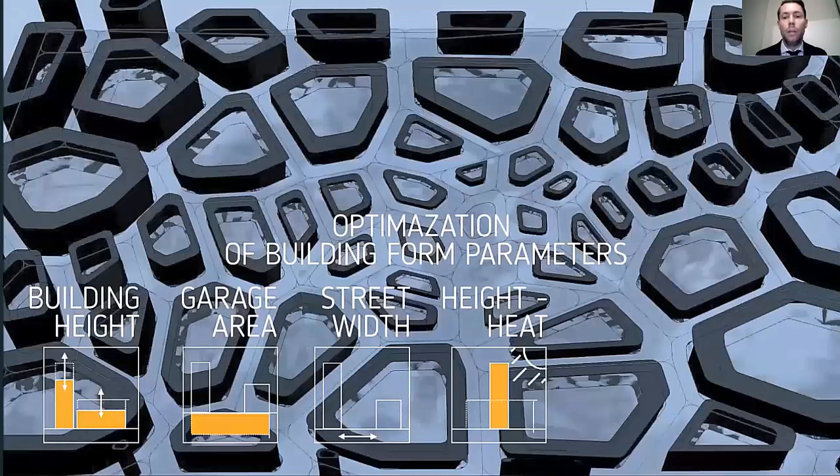Just to kick you off, I'm privately very interested in algorithmic design and parametric design as well. I understand that parametric design is the beginning of BIM. If we are thinking about designing, in this case urban structure, we can devise algorithms to optimize and develop a better urban structure, a more user-friendly urban space, if we use objective parameters that we know suit well the environment.

Just to start you off with the infrastructure, you basically know that the building industry is not effective enough. McKinsey & Company, you probably know them, they're the organization who prepare reports covering different branches of different industry sectors. They also do some reports on the building industry. They published in 2017, I think, a huge report called Reinventing Construction. And one of the guys from McKinsey said that we are potentially losing $1.6 trillion a year because of the insufficient effectiveness of the sector.

So let us think, what can we do to make that different? We'll be covering today parametric urban design. We'll be covering more precise and more detailed design, covering building concepts. And lastly but not least, we'll be talking about city infrastructure, which is really important, not only for us here in Poland, here in Europe, but also for people all around the world, because urbanization is making city infrastructure ineffective.

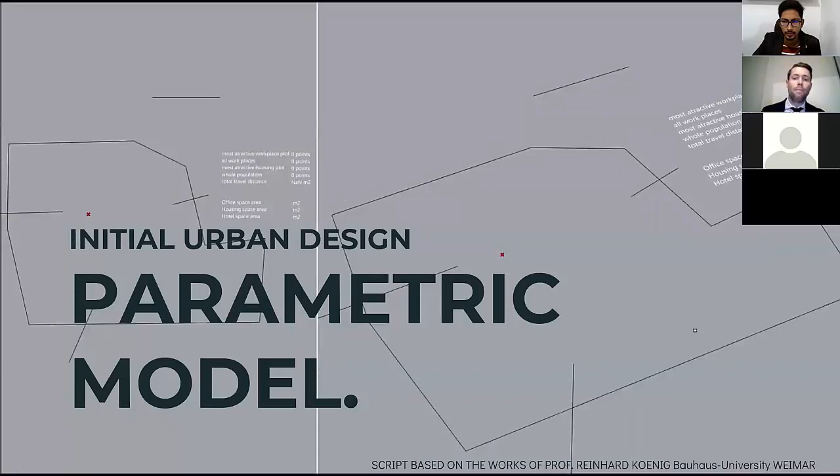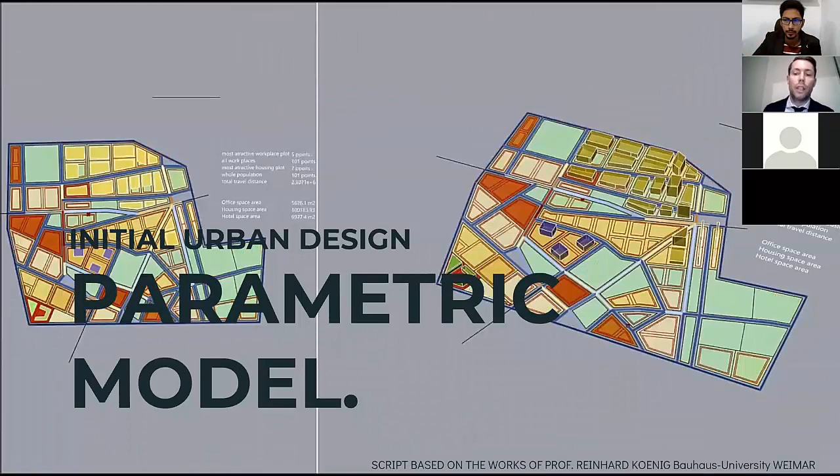What we do then is introduce parameters and algorithms. In this case, this is part of an algorithm devised by Professor Reinhard Koenig, and we've been playing around with this algorithm to devise a fast way to design urban space.

And this urban space, as you can see, is divided into different functions, because the monoculture urban spaces are out of date. People want to live in neighborhoods where they can use different functions, and different functions are intermixed.

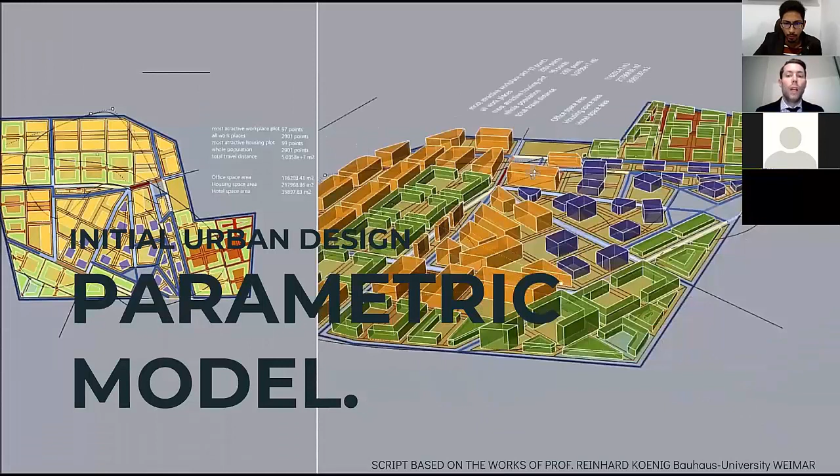Is it the grasshopper, Pawel? Yes, go ahead. Yeah, it's from the grasshopper, right?

Yeah, we are using different tools. I should say that this is in fact Rhino, and the algorithms are done in Grasshopper, with some nodes devised by other people, but we are also scripting on our own. But this is basically the same when we use Revit and Dynamo tools, because depending on the project, depending on what problems we are facing, we use different tools, which I'll be talking about later on.

As I say, we are using these algorithms to optimize the space, to give various solutions to our client, because we believe in choice, in informed decision making based on the parameters. So we are starting with BIM right from the initial ideas, which we try to make as parametric as possible, so that we can then objectively analyze the structure.

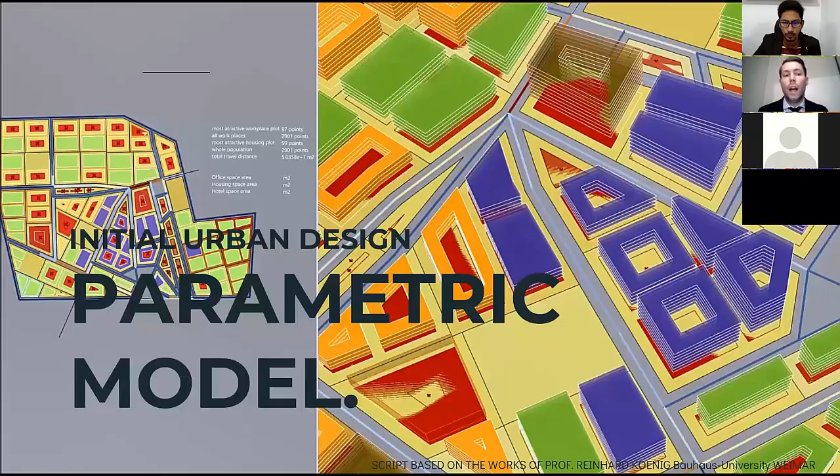And what you are seeing right now is the design space, the range of all the solutions generated by the algorithm. We sometimes use genetic algorithms, which are basically trying to find the most optimal solution, maximizing or minimizing one, two, or three of the parameters.

So what we are seeing here on the bottom of the screen, you see several of the solutions generated from the algorithm creating the urban design, urban structure. What you see up here are the parameters. On the left, these are the parameters which were going into the algorithm.

Let's say the grid of the streets, this was one of the parameters. Let's say the maximum length of the elevation, this was another parameter. And on the right, you've got parameters that are output of the algorithm that we are trying to measure, let's say the maximum usable space of all the stories of all the buildings.

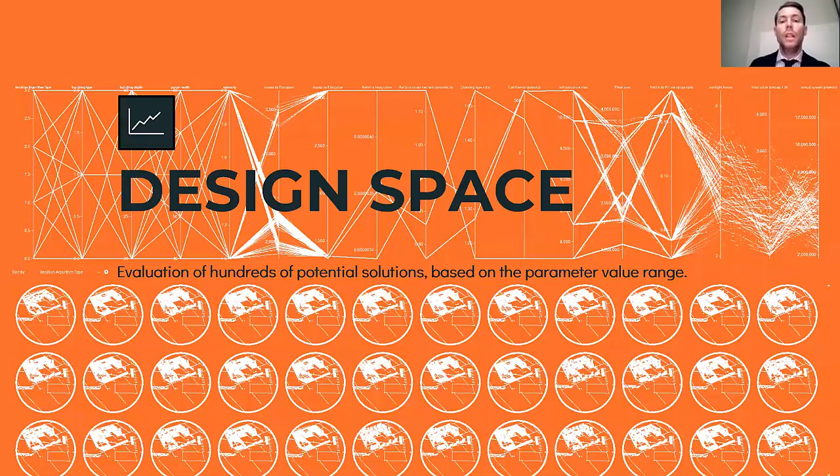Let's say that one of the output parameters is the area which is shaded, because when we are designing housing districts, we want to avoid shading too much of the elevation. So based on these parameters, we then try to select the most optimum solutions.

How do we do that? We just narrow down. This is the snapshot which I'm showing you is just one of the tools, called Design Explorer. It's an open software, a web platform, so you can upload your data as JSON files together with some CSV files defining all the parameters, and the platform is visualizing it for you.

And then when you narrow down the parameter domain, just as I did here, instead of getting 100, 300, 1000 solutions, I'm beginning to get the optimum solutions based on this narrowing of the parameters, right?

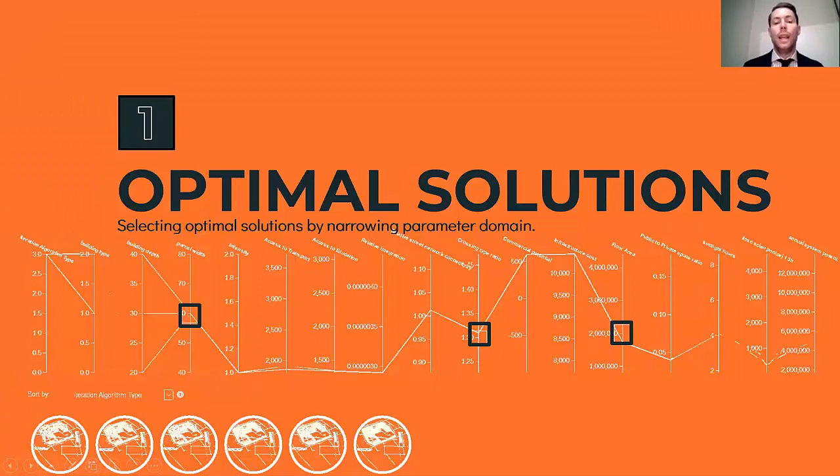So let's say the client wants to maximize the area, the usable living area, but this maximizing gets other parameters so low that the area is not interesting for the users. So then we can play around with those domains so that we can get an optimum solution for our client, but also for the future users.

This tool gives us the ability to objectively make decisions concerning really huge investments. And this is BIM for me, because we are all designing with information. The 3D model is just an add-on for the information we are gathering. So if the customer, the client, wants to be sure that the development he is doing will meet his requirements, then and only then he can choose one of the options, a 3D option.

So Pawel, is it also like Project Refinery or something? Project Refinery also has these options, right?

Yeah, it is, exactly. So Autodesk is providing some options for these kinds of solutions as well. You can export data from Dynamo. You can use Forge API to publish it on the net. This one is just a really simple tool based on JSONs, which you can easily export from both Revit or Rhino, and CSV files, which is also a really basic format.

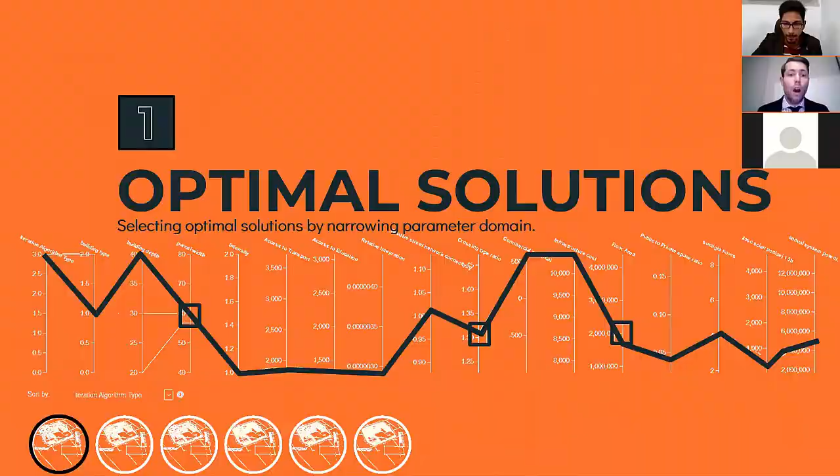Okay, what we do next is basically connect the models we are doing. This is another project done in Revit, using Dynamo as well to distribute function blocks around the urban development. But these urban blocks are already connected to the Excel file.

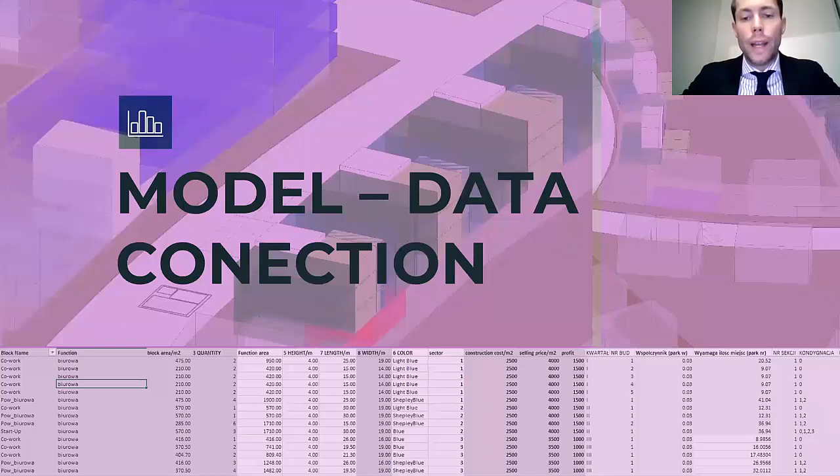What we experience more and more is that developers, our customers, not only want to see pretty pictures, but they want to give data to their analytics to check if the pretty pictures are really what they need in terms of functions, in terms of the topology of functions, in terms of the topology of space.

So what we do is connect usually either through scheduling the things we've got in the model, or through Dynamo, we connect our models to Excel files, and we send those Excel files together with some visualizations to our clients so that they can play around with those Excel sheets, sometimes introducing new data, sometimes changing the data we already have, sending us back those Excel sheets, and then through Dynamo we import those parameters back into the model, checking what are the consequences of those decisions.

Let's say the client wants to make the apartments, or the office space, more premium. Then he just plays around with the Excel file. He changes the cost per square meter of the office space, and then the whole development costs a lot more than it used to. So these are the parameters we are checking.

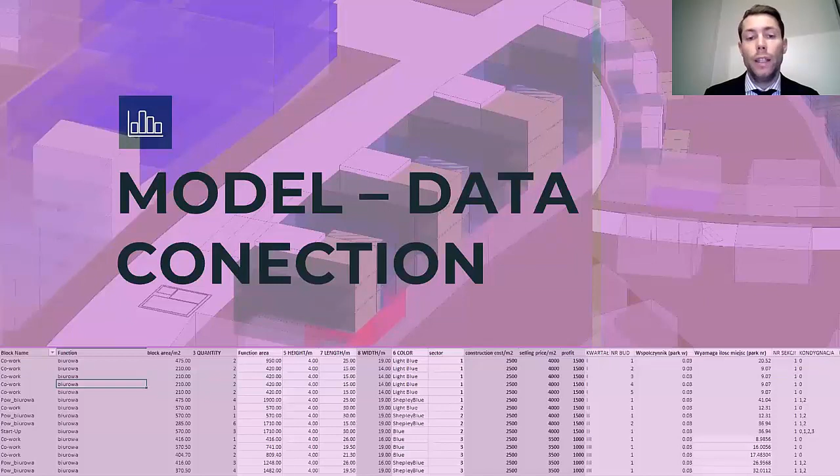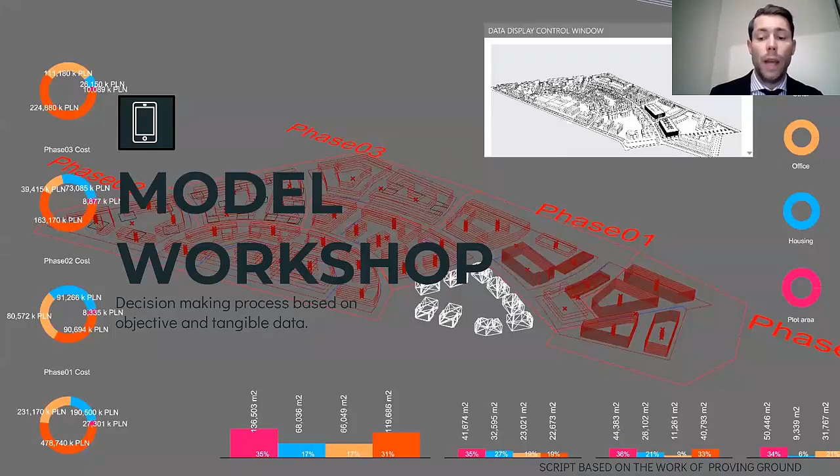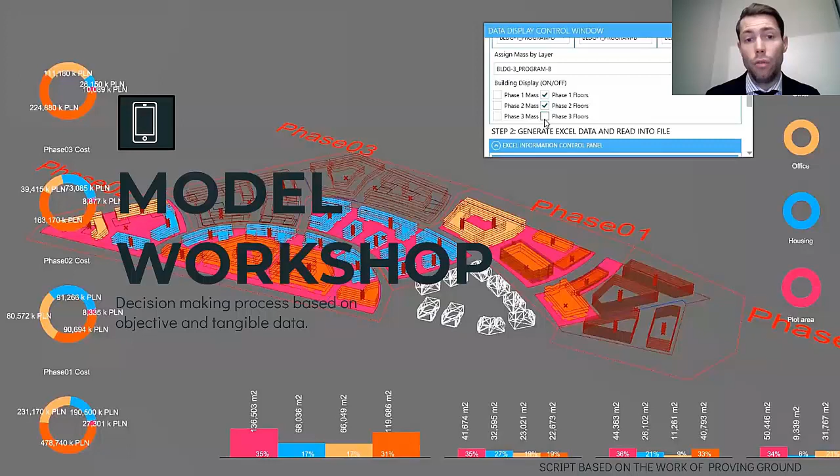These are the parameters that we are providing to our clients so that they can play around with them. And we believe that only informed decision making makes sense for our clients. So we are also preparing workshops to work hand in hand with our clients, so that they do not feel abandoned with all this data.

So basically, this is also from Rhino. There's been some scripts, some nodes used from Proving Ground. This is a developer of nodes for Grasshopper, but they are also developing nodes for Dynamo as well. So what we are doing here, we are preparing a workshop that shows the client live.

The basic information about the structure, phasing, and urban design of the development. So when he wants to check what happens if one of the buildings gets bigger, when he wants to check how the investment will be balanced if we change the outline of certain building types, then we can show it to him pretty fast, and he can react to those changes by seeing the results and by being informed what are the consequences.

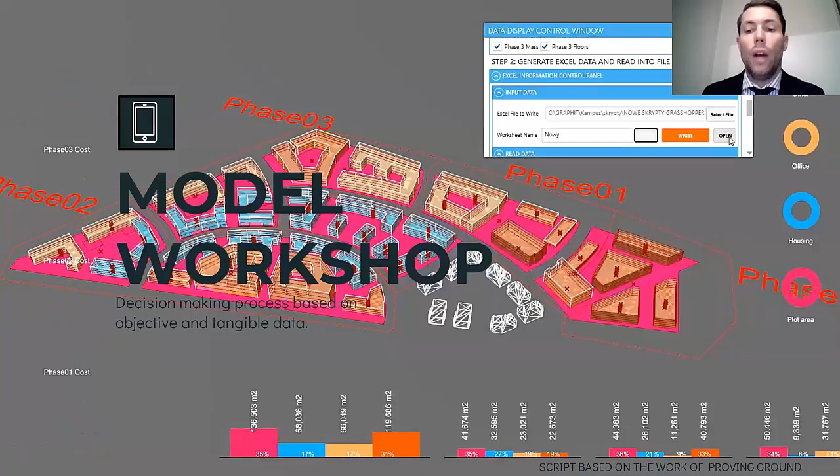So as I say, this is BIM. This is basically information management right from the start, because the parameters we are checking are also concerning the city infrastructure, the length and the width of the streets, and the basic functions that need to be provided.

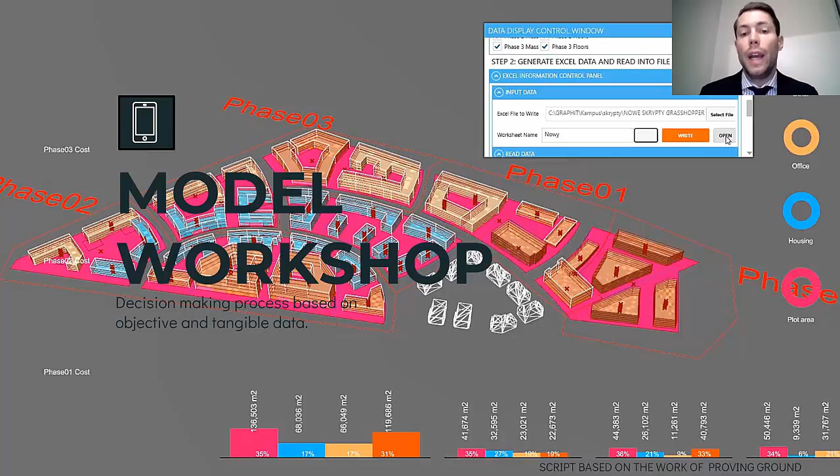And this is how we are using this GIS data as well in the algorithms. So then we are visualizing the models. Because we are working with 3D models, the visualizations are pretty painless. We use basically Lumion for that, or V-Ray, but usually Lumion, because this is the fastest and easiest way to update the models using, for example, sync in Revit. So every time we change the model just a bit, we can update it in Lumion and provide new visualizations in a couple of minutes. Sometimes because the material is already there, the greenery is already there, the people are already walking the streets. So this is basically a really good workflow to communicate our design with our client.

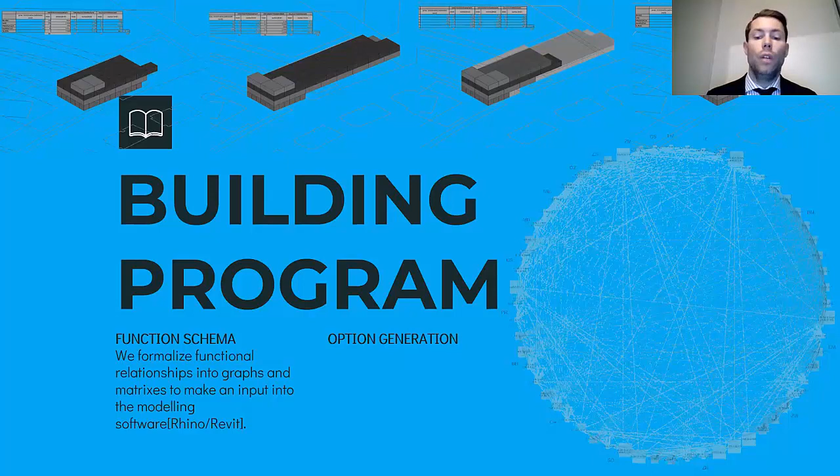Let's say, imagine that you need to design a hospital, or you need to design an airport. Then you've got certain functions that need to be in certain relationships with other functions. Let's say a patient room needs to have a close relationship to the doctor room, right? So we are formalizing it into graphs so that our algorithms will understand our intent and try to distribute those functions as close and best as possible. Because if those functions, as you can see on this graph, for example, are multiple, they are really hard to understand and to distribute in optimized fashion just by one human.

So we are using, again, Dynamo or Grasshopper to test different solutions, maximizing or minimizing crucial parameters. And then when we get those optimal few solutions, we are then evaluating them in BIM authoring tools such as Revit, ArchiCAD. So basically what you see on the screen is one of the projects.

The project was a bit complicated because the customer wanted to have a building that will be flexible enough so that after a few years, the main function of the building will be different. And not only this, but also the functions in the building were totally mixed. There were offices, there were laboratories, there were common spaces for brainstorming. There were also apartments there as well. So this was kind of a showroom building for a concept, for a bigger concept.

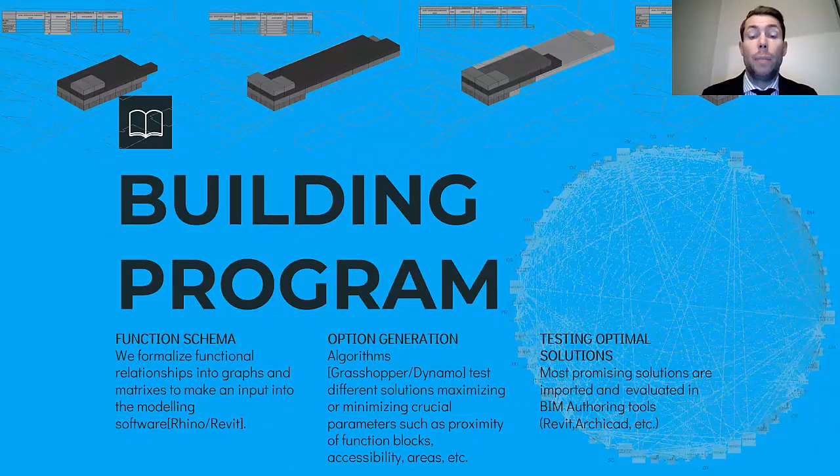So we needed to devise an algorithm that will not only distribute the functions for the first iteration of the building life cycle, for the first generation of functions, but we also needed to design some mechanism to redesign the building later on. In terms of the structure of this building, we just devised a really basic, flexible structure that could inhabit all those modules which would eventually be changed as the years passed. So the algorithm really helped us in providing this method.

When we do these optimal solutions, we are analyzing them through different add-ons and different algorithms for, let's say, in this case scenario, shading of the elevations. We do have a tool that can basically tell you up to a few minutes how long the sunlight will be penetrating one of the windows. So of course Revit and other software do have those solutions built in, or they are just a part of the package, of the bigger package.

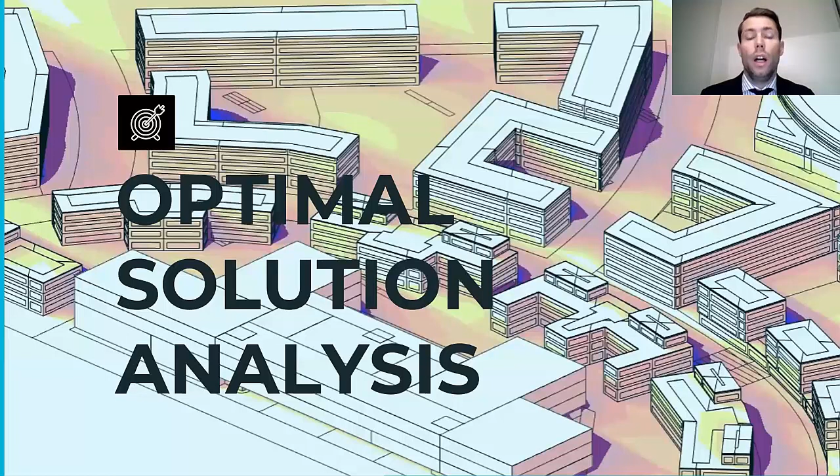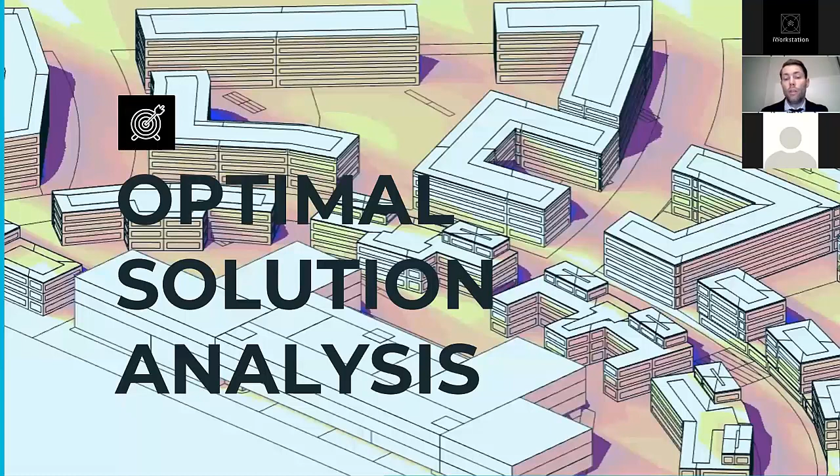But due to the really strict building code here in Poland, we needed to devise something more to compare those building code regulations to our design. So this is really important, especially here in Poland, here in Europe, in fact, where you have got a dense city neighborhood, to provide proper conditions for the people living and working in the buildings. And that's why we are trying to check those conditions at the earliest stages of the design.

I won't be talking much about developing BIM projects in terms of execution design or building permit design, because this is something probably covered by other speakers, and it's in the mainstream of the building information modeling community - how to prepare building permit design, how to prepare drawings, how to export them, and how to communicate them to clients.

But what I wanted to say is that the solutions we are using, like Design Builder, are not perfect. When people tell you that integration with sustainable design or CFD (computational fluid dynamics) software is instant - that you've got a BIM model and can instantly, magically integrate it with other software - it's not that simple, as you probably know.

That's why it's hard work to prepare those models properly, and sometimes even rebuild them in dedicated software. But we try to do it early on during the design stages, so that we can control the conditions our users will be facing.

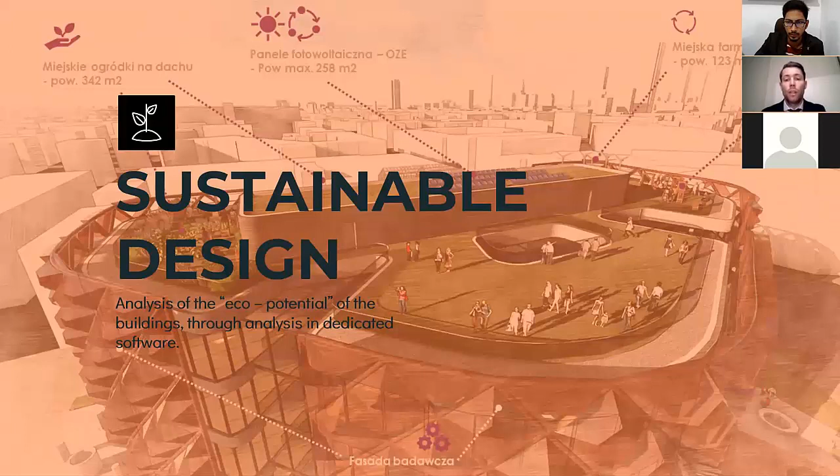We do this analysis of the eco potentials in different dedicated software. As I said, the integration is not as simple as you might think from conferences and from software developers trying to sell you these solutions, but nevertheless we do it anyway to provide a better environment for our future users.

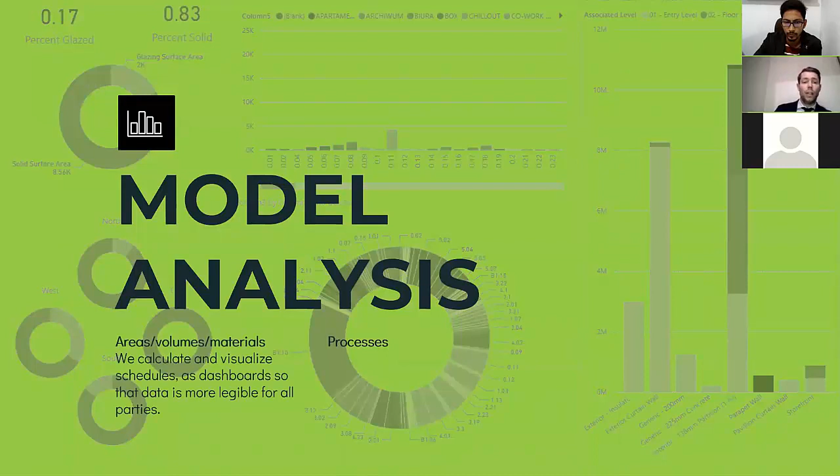What we do with our models is also analyze them in terms of basic things like areas, volumes, and materials used. We are also trying to check the processes being conducted when building those databases.

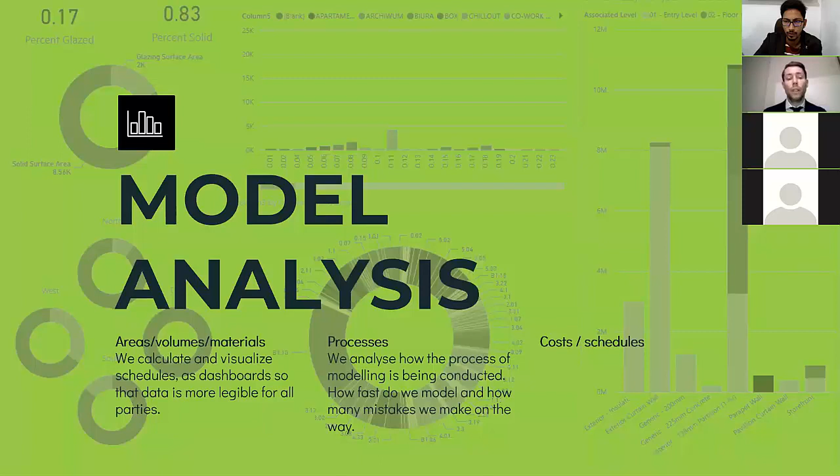We want to check, for example, how many collisions we are having throughout the process, whether the collisions are really solved or still there. So we use Power BI, for example, to visualize that data.

Okay. Yeah, we can proceed. Okay, good.

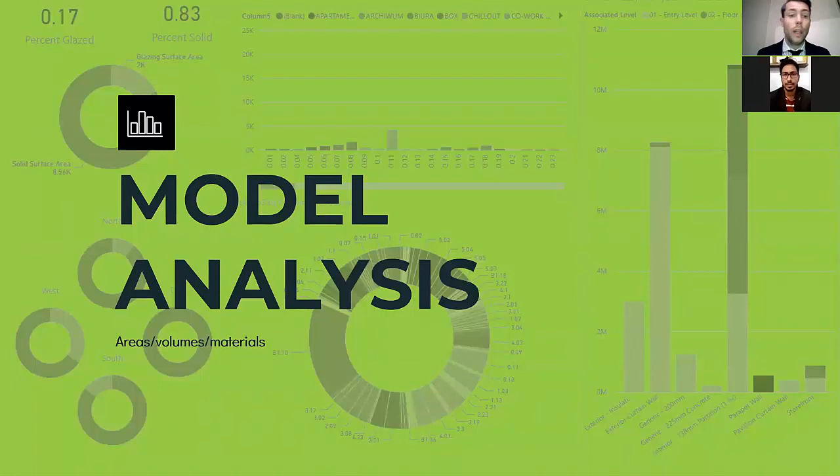We are basically analyzing the models in terms of this documentation - though in fact I haven't been talking about that, because you all know how to do BIM documentation from Revit or other files. There are some markings on the presentation, but that's okay.

So these models are being analyzed usually in Power BI, or just Excel files. What we do is get the data sets from Revit, ArchiCAD, or any other software we are currently using, and either push it through schedules formatted as TXT files and then import it into Power BI.

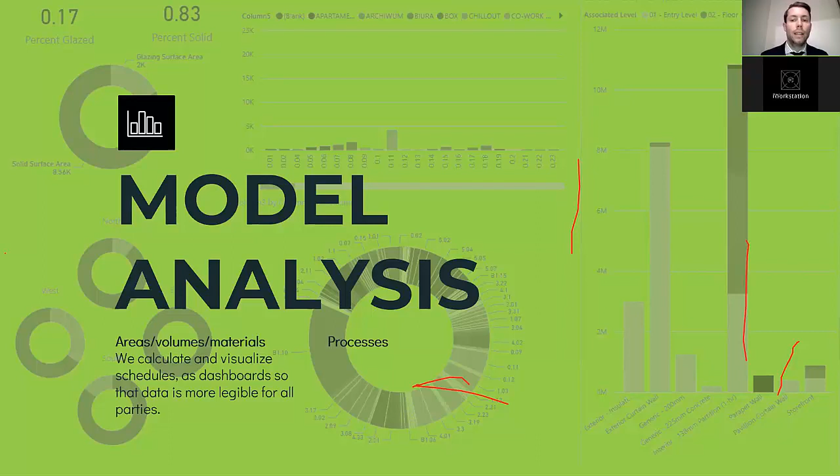Or we use Dynamo for exporting Excel files, which we then incorporate into Power BI, so that we can understand our buildings better in terms of area, volumes, glazing surfaces, materials we are using, and how the materials are affecting costs of the building.

Also, we are trying to control the process, so we integrate things in the Power BI platform like collision reports - how many collisions have been eradicated throughout the process, and so forth.

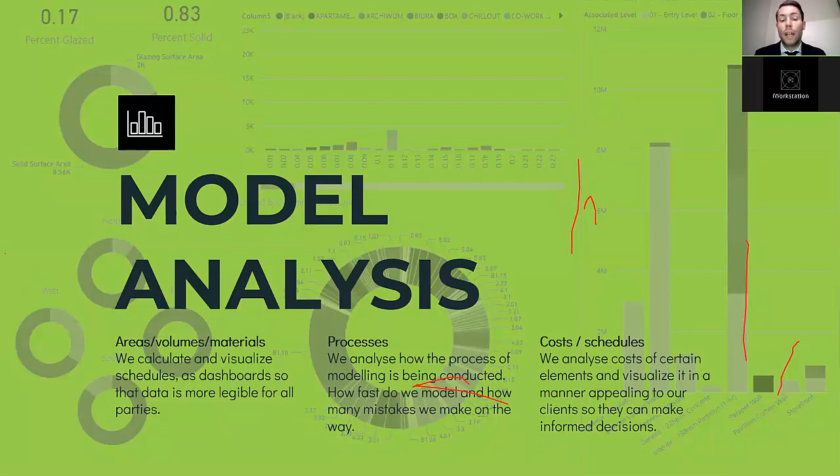We also provide these schedules, costs, and dashboards to our clients, so they can make more informed decisions based on the data they're seeing. Usually, in the traditional way of designing, they see the outcome - the building, urban structure, or infrastructure - but they don't really know what is the most cost-affecting element of those buildings.

If they're experienced enough, with a lot of knowledge concerning building structure and building workflow, they usually do know what the most costly factors are, but not always.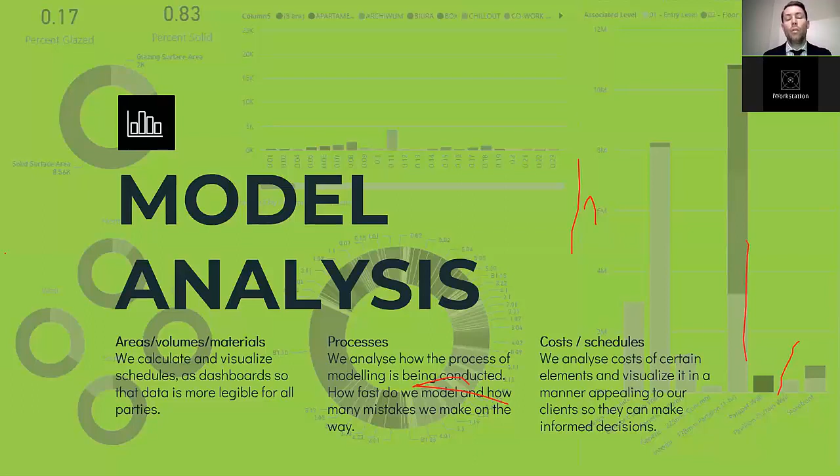Sometimes these are things that are not easy to spot just by looking at the design. That's why we prepare analysis.

So just to sum up the process: we start with the definition of basic parameters. We determine the local conditions, the local urban law parameters, the minimum spatial requirements, and the urban structure. We design and develop those functional blocks, which are then needed for the whole structure to be constructed.

Then we use data - we do data matrices of functions both in the urban space and in the building. We use ArcGIS Pro for that, and FME to integrate BIM and ArcGIS together.

This is, in my opinion, the best friend of the BIM manager. You really should use it as much as possible, because it really helps a lot during the workflows and processes.

So then we are incorporating this data into our models, introducing functional relationships, generating the border conditions in the model, and then we are using sometimes other algorithms to find the best solutions for our projects. And then we are visualizing and analyzing these optimal solutions through analytical software. As I said, this might be a plugin in Revit, this might be Dynamo, this might be Power BI, but this also might be a design builder application, or other software for analyzing 3D models.

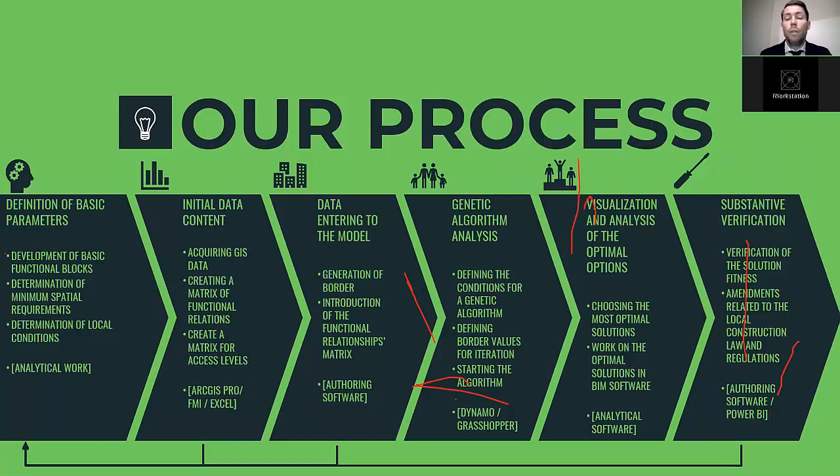And last but not least, we are trying to do some verification in the BIM authoring software. We have to verify them in terms of the building code, in terms of real needs. Sometimes the algorithms are giving us a lot of strange information, strange solutions, and that's why we need to evaluate all those stages through informed verification. And if the verification is negative, then we need to go back and either redefine basic parameters or redefine the algorithm itself, or use even other algorithms if the solutions that have been provided are not enough.

So basically, this covers those first two modules. If you have got any questions, please go ahead and ask them now, and we can then proceed with the last module, which will be about city infrastructure.

I have also one question to any question then? Or yeah, shall we? Pawel, I have a question to you. When we work with the BIM and GIS integration, how can we add the attributes to an information model that is being made in a Revit tool or an ArchiCAD tool, and have those attributes visualized in the ArcGIS software? So how is it possible? Is it possible to retain the information that we integrate through ArcGIS to Revit or ArchiCAD?

Oh, definitely, definitely. There are several methods for that. In fact, there are so many that I will just focus on the workflow we are doing. On the other hand, we want to have a complete control over the parameters we are exporting from Revit into ArcGIS and then into GIS platforms. We are using FME software. This acronym is short for something, but I really do not remember. But if you check FME, you will find out.

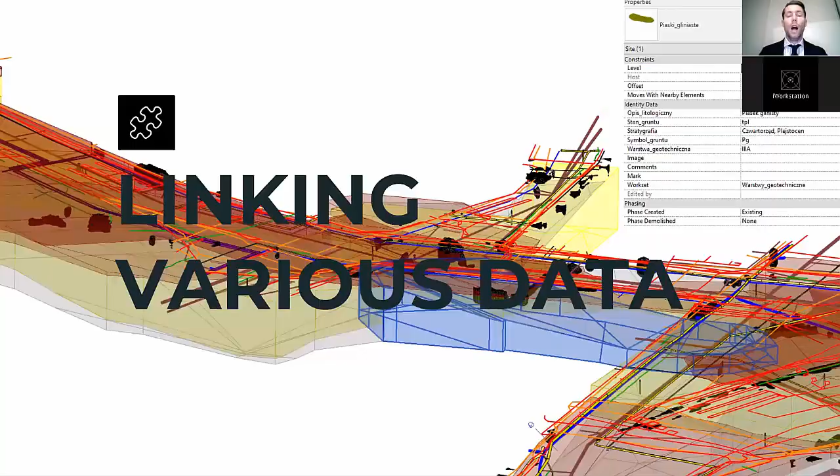So first we need to link various data from various survey devices. Some of them are non-destructive, some, like drilling, are obviously more invasive. But how we start those infrastructural projects is with a proper survey. And this is also BIM.

You cannot design anything, you cannot integrate BIM into GIS if the data you are having, even the GIS data—because GIS data is obviously less detailed and less accurate than the BIM data—you cannot integrate those designs properly if you do not have precise information about what's going on, not only on the surface. You do have laser scans and drones and everything, but you also need to know what's underground, because the standing joke is that the money is underground, right? When you strike a pipe, when you strike some unfavorable soil conditions, your project faces a huge problem.

So we are using some geoscanning methods: GPR, ground penetrating radar, electrical resistivity tomography, and also drilling. But we are also acquiring data from open source data platforms so that we can prepare the initial inventory model, and then model on this base so that our projects are in line with what's really there.

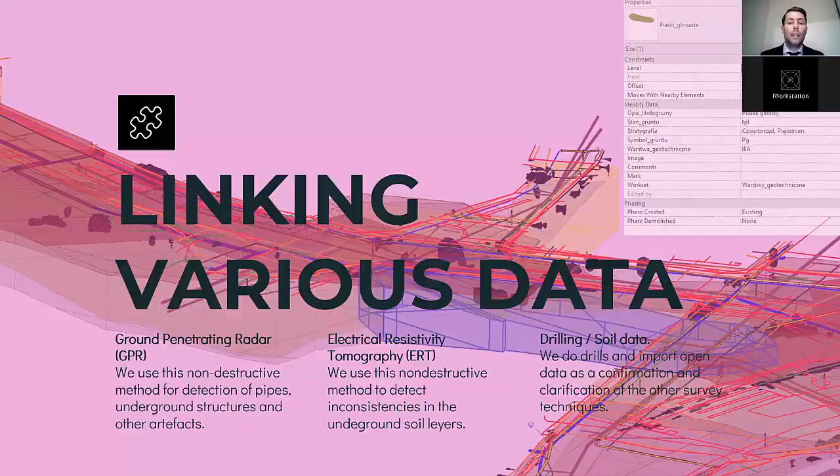So our client is happy because she doesn't have to pay, right? For infrastructure models, as you can see, we use different tools to do the survey—LIDAR scans, UAV surveys when the areas we want to scan are inaccessible, and geoscanning, different methods.

This is another project conducted in one of the cities in Poland, where we surveyed the underground infrastructure, and then we were supposed to BIM the 2D documentation to check it, because the documentation of this modernization of the whole area was conducted traditionally in 2D drawings, and you can see how many things are underground over here.

The funny thing, once again, are these elements over here. I can show you in better contrast. Those green things that you can see over here are detected old foundations, because before the Second World War, the buildings were a bit further on towards the axis of the street.

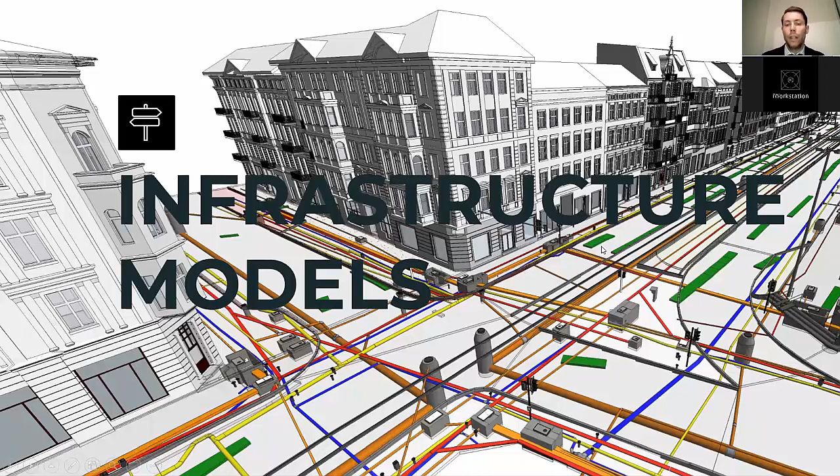Had we not found those elements during our surveys, had we not modeled them into the model, and had we not checked the design—and the design itself had many clashes as well—after we modeled all that infrastructure, the terrain, the pavements and everything, it turned out there were many clashes. So we also had to resolve those clashes as well.

But had we not done it, the general contractor responsible for conducting works over here would surely claim a lot of money—millions of Polish zlotys, millions of dollars—for those additional works which were not ordered during the procurement phase.

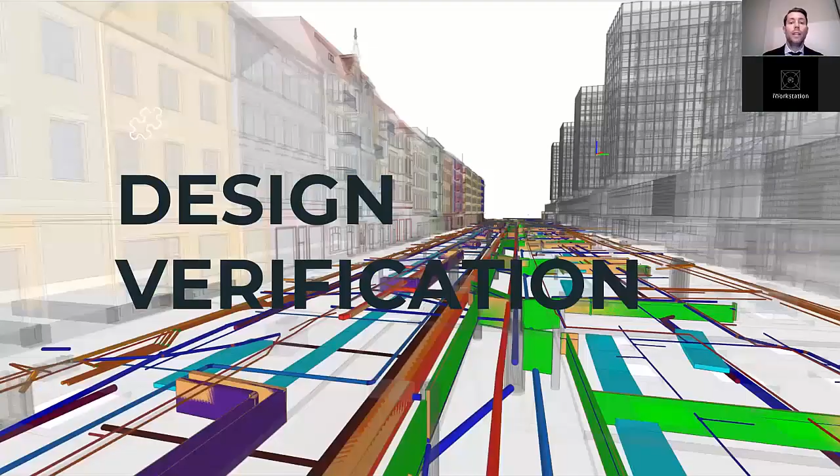So this is the design verification. As I said, BIM comes whenever you want it to come. Sometimes it comes right from the start, from the initial design, the initial concept design. But other times, as in this case, BIM comes as a tool for verification of documentation done traditionally.

Because of many mishaps during construction works in our cities, our local authorities have decided—not all of them, but some—to check the documentation beforehand, before procurement, and later carry on future design within a BIM environment right from the start. But as an initial phase—because as you know, BIM is not incorporated into legislation here in Poland—we are facing some problems introducing BIM into the wide market, probably as everywhere.

So as an initial phase, sometimes we need to BIM-model the execution design just to show the value of BIM.

The funny thing was, when we showed the report of those clashes and discrepancies in the documentation, in the building permit documentation, to the authorities, the guy who was not an engineer—he finished some economics university—said, 'Okay, now I do not need you guys, I can coordinate it myself.' It obviously is not true, but imagine this manager looking at his 5th or 10th or 15th project on a 2D drawing. When you see this grid of different lines, elements and annotations, you do not really understand what's going on.

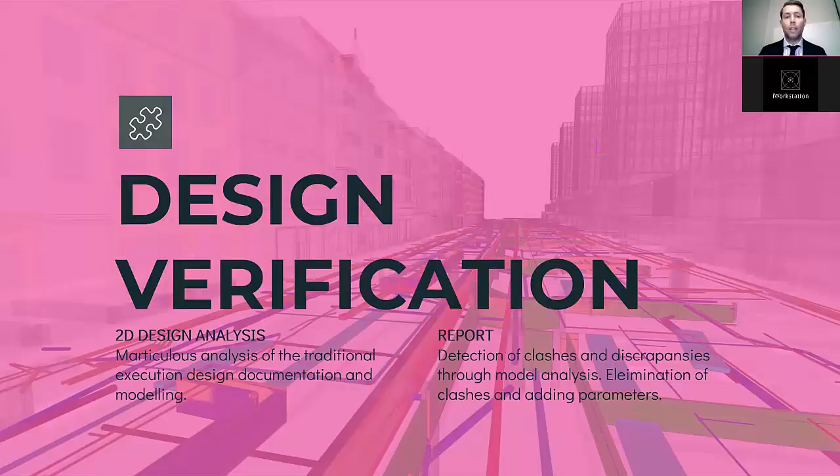So BIM GIS integration, as I said, we are conducting huge infrastructural projects here in Poland, but also in Europe and other parts of the world. When we do, we are designing whole segments of roads or rail infrastructure, but then we want to see it in a wider context, and that's why we integrated this BIM project into GIS.

This gives us the ability to visualize and animate those projects for public consultations, because when we are introducing such a huge project into the neighborhood, people are really reluctant. They do not want this investment done because their green backyard is turning into a highway, right?

So visualizing it and showing it to the people sometimes lets them know that the area will still be safe, the area will still be green, but the pros of these solutions are that the transport will get to their doorstep basically.

So this visualization and animation is not a small thing. Sometimes this PR element sells BIM, and BIM GIS integration sells it even better.

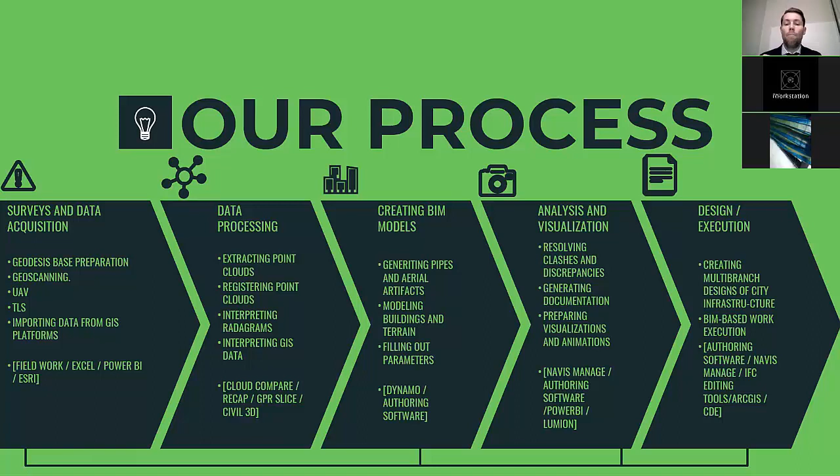So it's about complexity, right? Our cities are getting more and more complicated, our built environment is getting more and more complicated, so the integration of different kinds of data is important. You can recall GIS data, but you can also recall data being incorporated into this via Grasshopper scripts.

This is a really important thing to have in mind when creating a BIM database. So this is it for me.